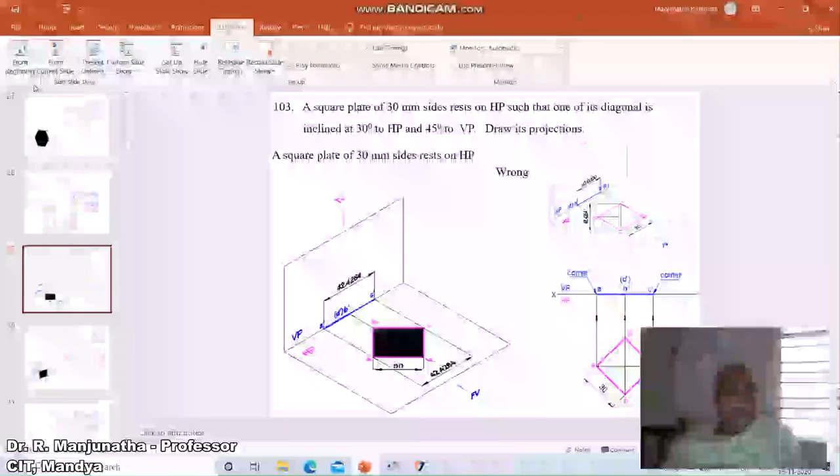A square plate of 30 mm side rests on HP such that one of its diagonals is inclined at 30 degrees to HP and 45 degrees to VP. Draw its projections. So how to start with the given problem?

Here he has not mentioned whether the corner is resting on HP or the base is resting on HP. But he says that you have to keep the initial position of the square plate such that one of its diagonals is inclined at 30 degrees to HP and 45 degrees to VP. So that means the inclination given is the true inclination.

There are two possibilities in which a square lamina can be placed: one with respect to the base and the other with respect to the corner. If I place one of the sides on HP, the diagonals will become inclined to VP. So obviously you will not be able to get the true length of the diagonal in the front view when you place one of its sides on HP.

So this position will become wrong, because the diagonal AC is inclined to VP here, so A dash C dash will become an apparent length. BD is also inclined to VP, so B dash D dash will become an apparent length, but the inclination given with respect to HP is true inclination. If you rotate in the second position, you get the apparent length while the inclination given is true inclination. So I cannot draw this in the second position front view, and this position becomes wrong.

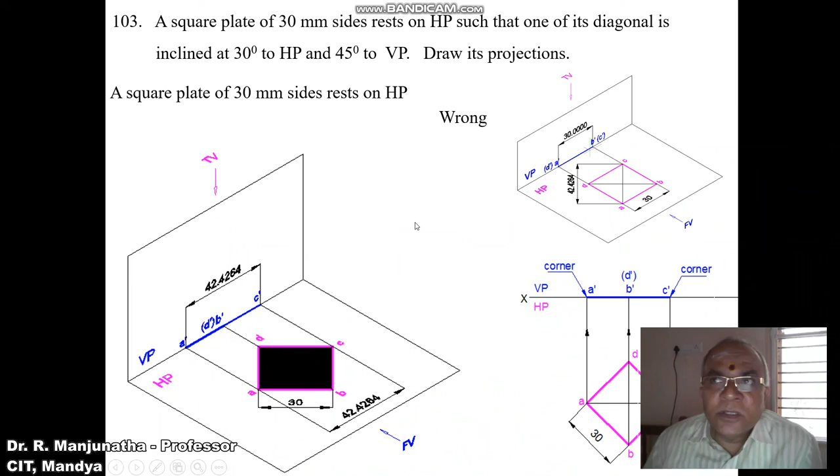Suppose you consider the corner position. AC is the diagonal which is parallel to HP, so A dash C dash is parallel to HP, and you're getting the true length. Since the inclination given is also true inclination, in the second position when you rotate the front view, the diagonal will have the true inclination and the true length. So therefore this position is right.

So we need to keep the diagonal parallel to HP, so the initial position has to be the corner. From the front view, ABC is near to the observer, so A dash, B dash, C dash are visible, and D is away, so D dash becomes invisible. The surface is parallel to HP, so you get the true shape, and it is perpendicular to VP, which is why you get a line in the front view.

That line is here. This end is a corner and this end is also a corner. The diagonal AC, that is A dash C dash, is parallel to HP, so you get the true length in HP. As AC is parallel to VP, you get the true length in VP. So this is how we place the initial position.

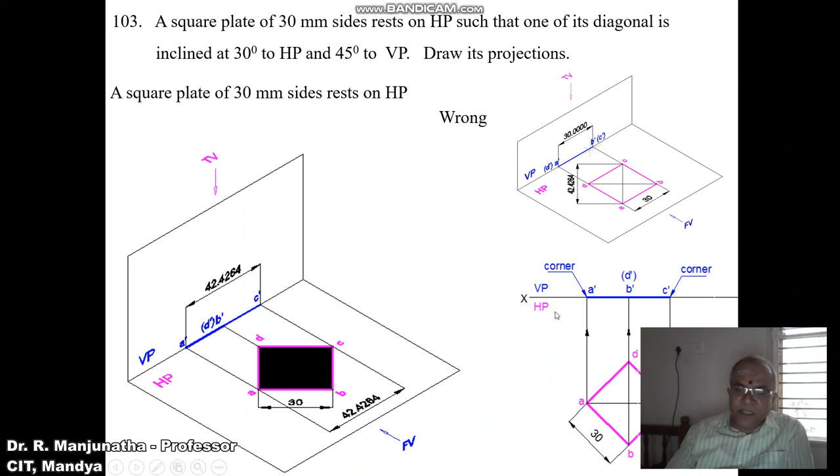Now he says one of its diagonals is inclined at 30 degrees to HP. The diagonal AC is parallel to VP, so you get the true length, and the inclination given is also true inclination. Keep A dash on the XY line and rotate the square by 30 degrees, so the diagonal becomes inclined and you get its true length here, because AC is parallel to VP. As AC becomes inclined to HP, you get the apparent length in the top view, that is AC.

In the second position top view, that AC is going to become the apparent length. The dimensions shown are only for reference. In the second position, we can see the surface is inclined to HP and also perpendicular to VP. That is the reason why you are getting a line in the front view. So we are going to see the surface become a line here.

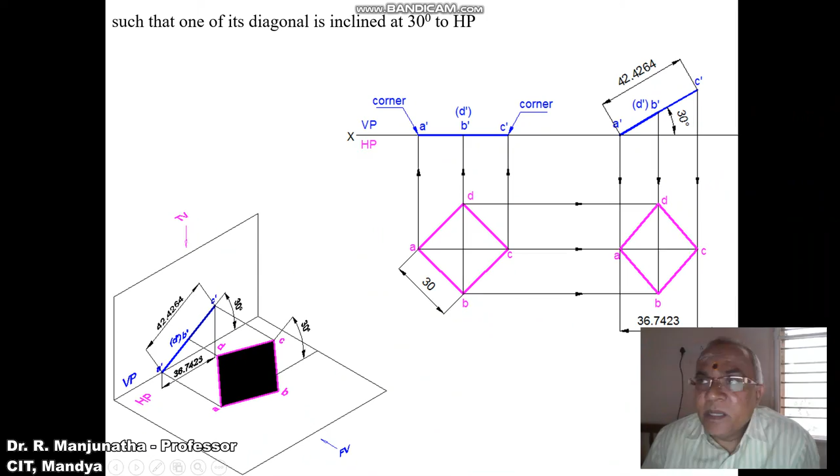Once the surface is inclined, the diagonal AC will also become inclined, so naturally we are going to get the apparent length. Such that one of its diagonals is inclined to VP also at 45 degrees. The inclination given is a true inclination, so we need to find out the apparent length.

Why apparent inclination? Because in the second position top view, as the diagonal is inclined to HP, you are getting the apparent length in HP. The inclination given is a true inclination. So on true inclination, how to get the true length? First we will find out the beta inclination, then redraw the second position top view on that beta inclination line, and then draw the front view, so that you will get the final sketch.

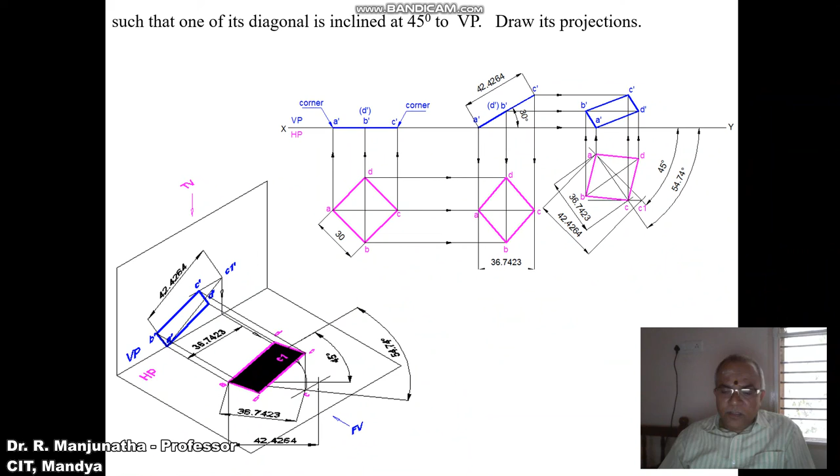This is the projected sketch of the front view, and we can see the projected surface here, and this is the projected surface on the top view. This is the beta inclination; we are going to get 54.74 here. This is also 54.74. On this we will be able to get the front view. This is how you analyze the position in 3D as well as 2D.

Now we'll try to solve the problem. First draw the XY line, and mark VP and HP as shown. Consider any point and mark it as B. With respect to the horizontal line, measure an angle of 45 degrees on either side and draw inclined lines passing through point B. Using the compass with B as center and a radius of 30, cut an arc on both lines to get points A and C.

Through A, take the radius of 30 and draw an arc, and from C cut on the previously drawn arc to get point D. Join A to B, B to C, C to D, and D to A with a dark line. Draw vertical projectors from A, B, D and C to the XY line. Mark A dash; from the front view, ABC is near the observer, so A dash, B dash, C dash are visible, and D is away, so D dash is invisible. Join A dash to C dash with a dark line.

Here this end is a corner, and this end is also a corner. As one of its corners is on the XY line, consider A dash on the XY line, as one of its diagonals is inclined to HP at 30 degrees. The diagonal AC is parallel to VP, so you get the true length in VP. Take the true inclination with A dash as center with respect to the XY line: using the protractor, measure an angle of 30 and draw an inclined line.

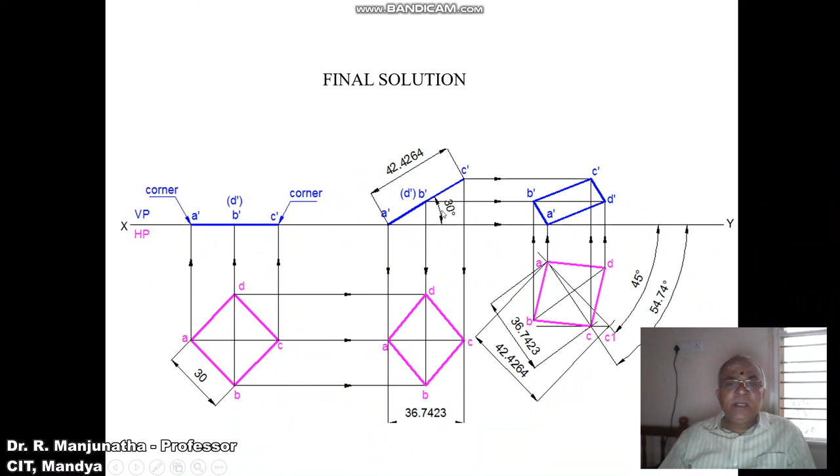Then draw a vertical projector from A dash and draw a horizontal projector from A. Both these 2 points will intersect at this point A. Similarly, draw a vertical projector from B dash and D dash, and draw a horizontal projector from B and also from D. Both of these 2 points will intersect at this point B and also on D.

Similarly, draw a horizontal projector from C and draw a vertical projector from C dash. Both these 2 points will intersect at this point, and you mark this point as C. And then join A to B, B to C, C to D, and D to A with a dark line.

Now, as he says that one of the diagonal is inclined to VP at 45 degrees, so consider any point and then draw a horizontal line. With respect to the horizontal line, you mark this point as A. With A as center, you measure an angle of 45 degrees below the horizontal line and then draw an inclined line. So the inclination given is the true inclination. So on the true inclination line, we have to get the true length.

So where is the true length? The true length is in the first position top view. As we see, the diagonal A dash C dash is parallel to HP, so we are getting the true length in HP. So by using the compass, you measure the distance from A to C with A as center, cut on the 45 degree line which is drawn, and you mark this point as C1, and then through C1 you draw a horizontal line which is the locus line.

Then you take the second position top view which is AC. By using the compass, taking the radius of AC with the same A as center, cut an arc on the locus line. You will mark this point as C, then join A to C. So this will be the beta inclination, and you mark that as beta. Don't use the dimension. The dimension here which is shown is only for reference.

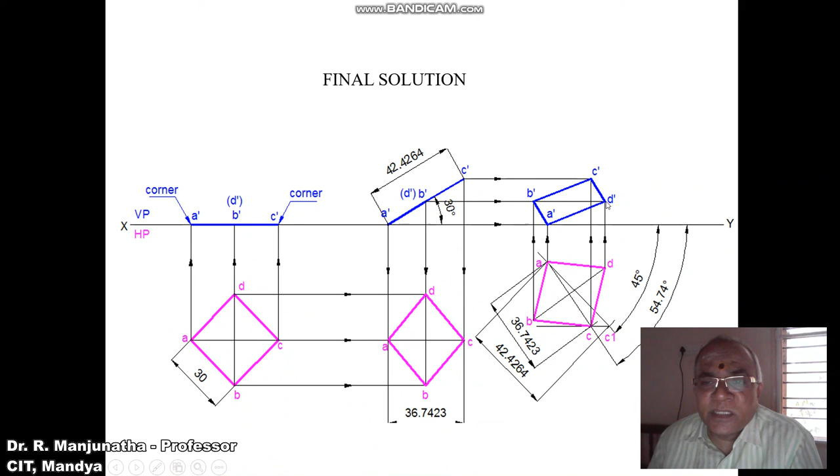Similarly, draw a horizontal projector from C dash and draw a vertical projector from C. Both these 2 points will intersect at this point, and you mark this point as C dash. Then join A dash to B dash, B dash to C dash to D dash, and D dash to A dash with a dark line.

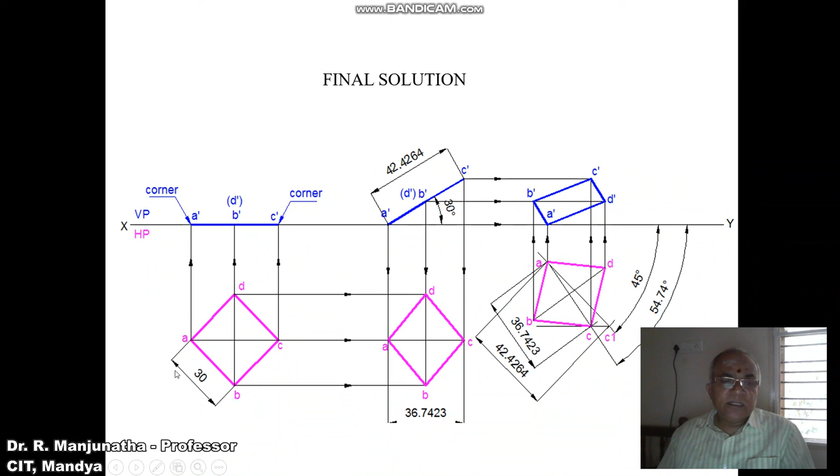This is how we will be able to solve the problem in the sketchbook and show the dimensions of 45, and instead of showing 54.74, you mark that angle as beta, and the diagonal AC is inclined at 30 degrees to HP, and then this is the square of 30 mm. Since we have considered all the parameters which are given in the problem, hence the problem is solved.